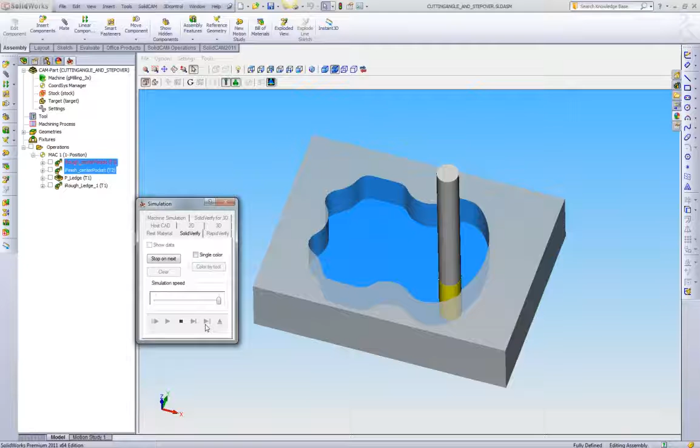To show what the stock looks like before this cut, we'll go to our SolidVerify and play this. Here we have just an iMachining roughing toolpath, and then we also have a finishing toolpath to make sure it's the exact geometry. If we show our target, what we can see is we have this center pocket finished, now ready to machine this ledge.

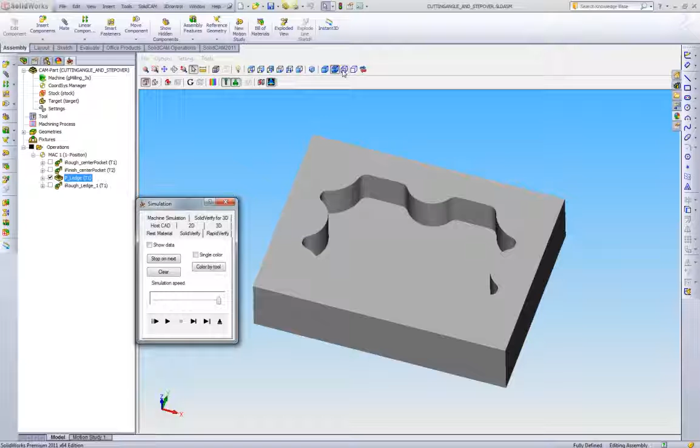We have a standard pocketing toolpath set up here. As we can see, we have our 4 offset passes to machine that ledge. Let's go into the SolidVerify, and we're going to take a look at what happens. We're going to go to a top view, and we're going to also switch on wireframe so we can see how the tool is cutting.

Here we have the tool entering into the first corner. So there's a few things we want to show here and measure. We're going to use a screen capture utility called Jing that I like to use. It's going to allow us to draw some arrows on this.

Now what we have here is we have a few things going on. We have the toolpath, and we have what the tool is doing along this toolpath. We're going to draw an arrow for the cut direction. Here we have the tool moving in this direction. We can change this color to blue if we like, and we're going to label this as cutting direction.

Now, when we look at step over, or really what we're looking at is width of cut, we want to measure width of cut based on the cutting direction. So we're going to draw 2 arrows on where the tool is touching at the first point, here, and where it's touching here. We always want to be measuring with the cutting direction.

Now what we see here is this width of cut that this tool is actually taking in the corner is actually 3 to 4 times larger than the width of cut on straight lines. Generally, when we think of step over or width of cut, we are thinking in terms of straight lines. But what happens when you look at the tool changing direction, turning corners, going into concave areas, the direction of the tool is changing, and it's not just cutting a straight line. So what we have here is this step over that's increased 4 times over the straight line cut.

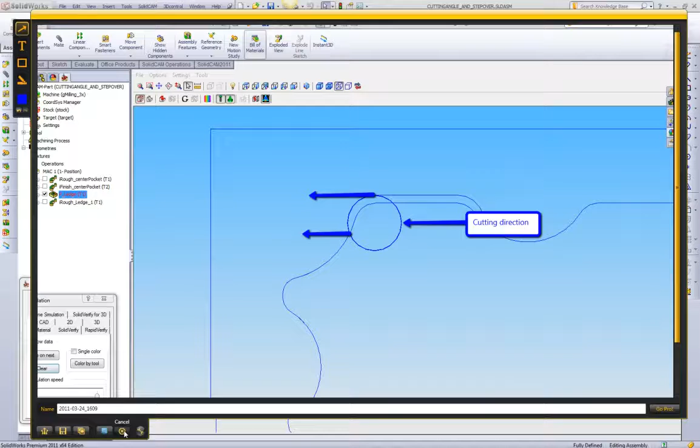So let's keep on going a little further. Now we have our next motion. Here we did a circle coming around into this little corner. We're going to do the same thing with Jing, and we want to measure what the cutting direction is and what our width of cut is.

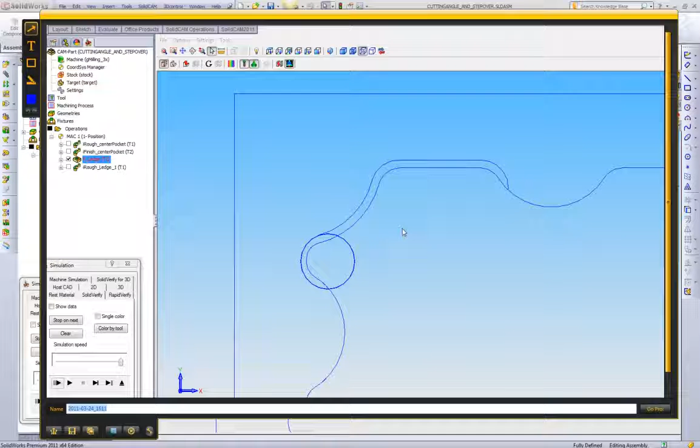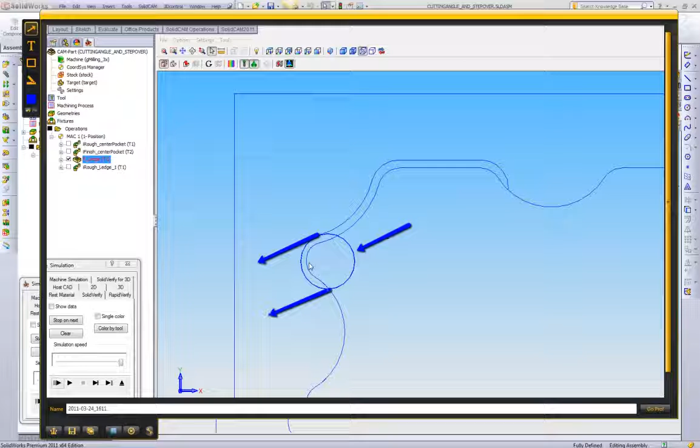Now since we're doing a corner, the end result is the cutting direction is generally looking something about like this at the end of the corner. So now if we measure our width of cut, once again going parallel with our cut direction, here we can see the width of cut versus our straight line is something maybe 6-7 times the width of this. So here is where we have all of this tool overloading with standard parallel style toolpaths with our standard step over.

We'll just play through the rest of the toolpath to show you what you get. Now visually what we see is we have a constant width of cut just looking at this visually with our eye. But in reality, as we just saw, the cutting direction is not a straight line, so the width of cut that the tool or the material that the tool is actually removing is not constant by any means.

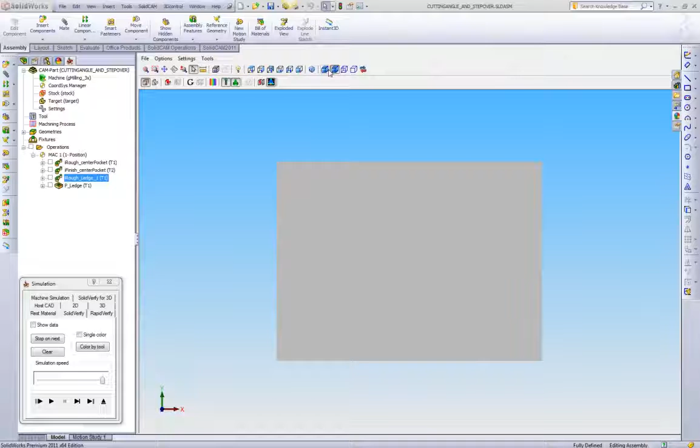So now let's go take a look and see what iMachining gives us here. We're going to take that pocketing toolpath and just drag it below it. We're going to go back to our SolidVerify and repeat the exact same steps. We'll zoom in on this corner, we set it to our top view, and we also go to wireframe. And we're going to single step through iMachining.

Now the first thing we see here is that iMachining is gently entering into the material. Once we hit here, we can see we're now at our width of cut, or the controlled step over we have.

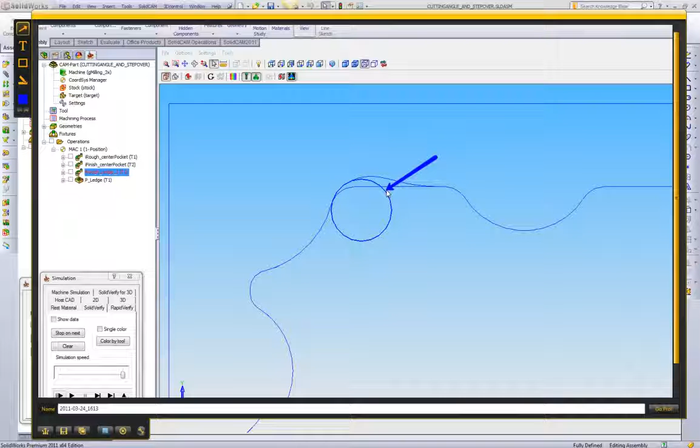We can see as we're coming into this corner now, iMachining is starting to roll the tool in this direction, and we can see our width of cut changing. Now, let's use Jing again and let's see what happens here. We're going to draw our arrows again. So what we see is, since we're kind of turning this corner, we basically have the tool coming at a direction roughly like this. Once again, we'll label this cutting direction.

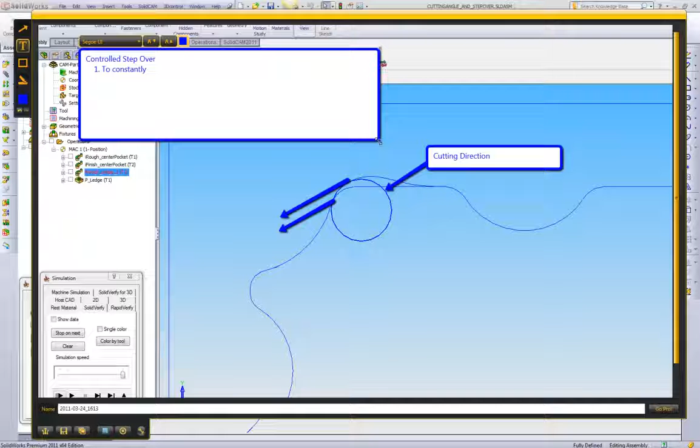We're going to draw our arrows. Now what we can see here is this width of cut, based on cutting direction, is now the same as the straight line width of cut. Which brings us to our definition of controlled step over. And we'll type this out, that way it's very clear for everybody. So controlled step over is to constantly adjust step over to give a constant width of cut based on cutting direction.

So this is important, very important to think of. We all know what step over is, but generally we are only thinking of step over in straight lines. iMachining is using controlled step over. This is where we're actually adjusting the step over to give a constant width of cut.

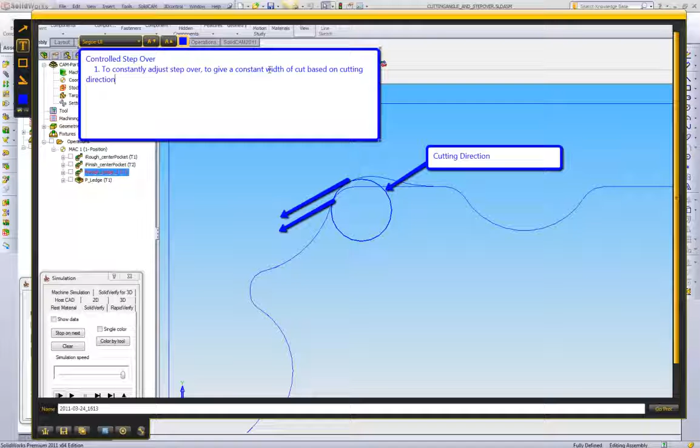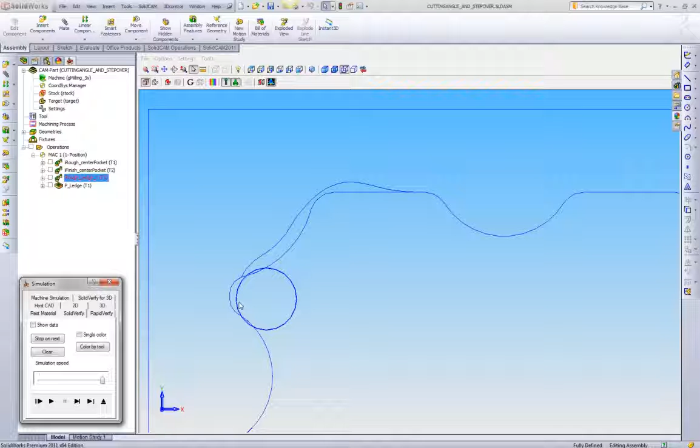We're going to continue playing through this a little bit. Here we see an interesting thing that happens. iMachining, as it was trying to cut this corner, there was no way for it to hold the width of cut or the step over that we defined, so the tool actually had to back away and could not get into this corner, for it was impossible to give the user the controlled step over it wanted entering into this corner. And then we'll play through one loop. So there we have one loop.

Now here we see the very big difference to the standard parallel offset toolpath. Looking at this, it appears as if we'd have a varying width of cut or a varying step over, because we see different amounts of material being removed. But in reality, we measure the width of cut based on tool direction to give a constant load on the end mill, because we're mostly concerned about what the end mill is doing when it's removing material, not what the toolpath looks like in a CAM software. Here we see we get this varying step over along this entire part. You can see it getting to the thickest points when it's at the straight lines.

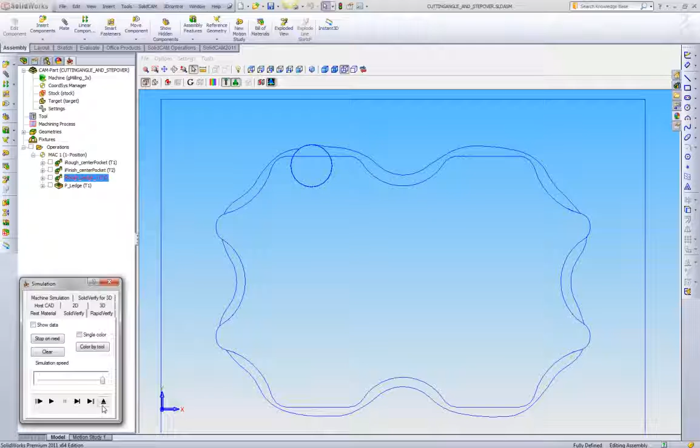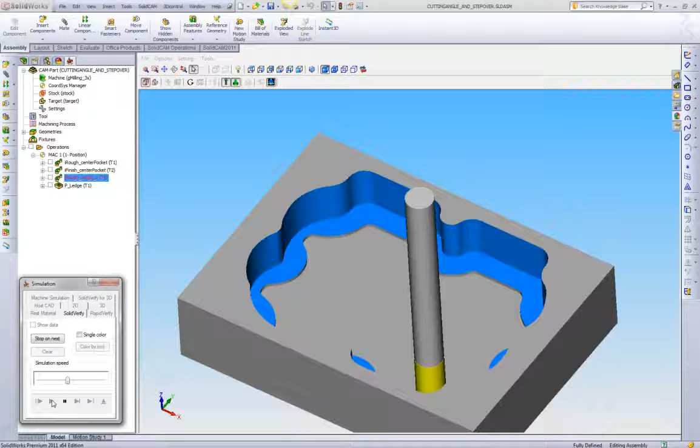And we'll actually switch to an isometric and just finish playing out this toolpath so we can see iMachining finish. What iMachining does is it continues to progressively shave away the material in a constant spiral motion with our morphing spirals. Then at the end it goes through and cleans out all the corners to remove that material. We'll also take a quick look at the toolpath again. So here we have our standard pocketing step over, and here we have our iMachining toolpath, where we can see it's actually varying.

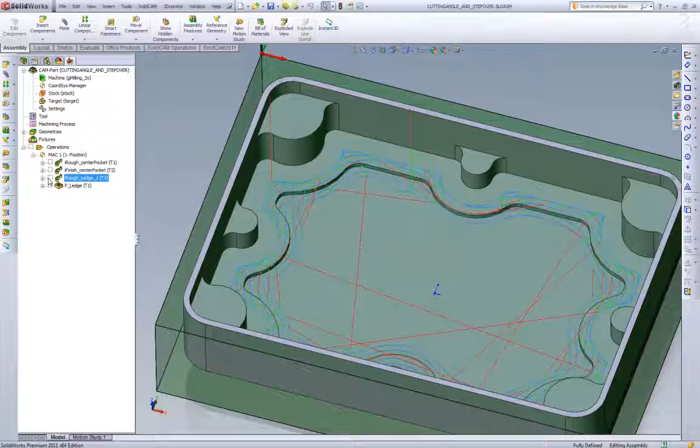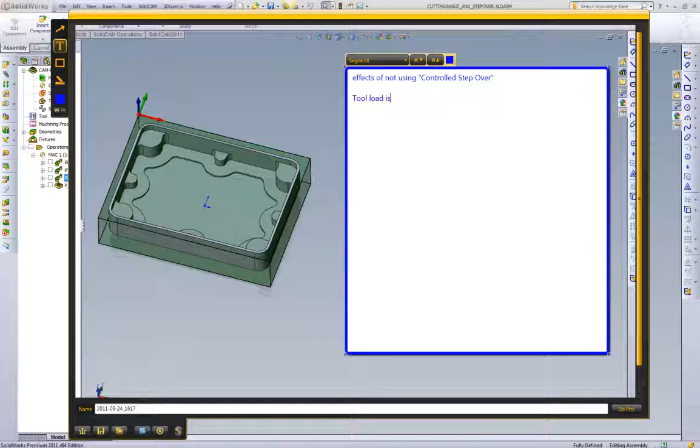Now what we want to do is review what this actually does for us. And once again we're going to use Jing. So what are the effects of not using controlled step over in your CAM software? The easiest thing to look at is the tool load is increased in the corners, i.e. non-straight line cuts. What this is going to lead to is tool wear and fatigue. It's going to lead to broken tools. It's going to lead to multiple depth of cuts.

And when we pick multiple depth of cuts, it's going to wear the lower portion of the tool's flute. So for instance, if we had a tool with a 1-inch flute length, generally we might only be cutting with a depth of cut of 100 thou. So we had 1-inch flute length, but we only cut with 100 thousandths. That means we never get to use the other 900 thousandths worth of flute length. This is what leads to premature tool wear before the tool's actually finished machining.

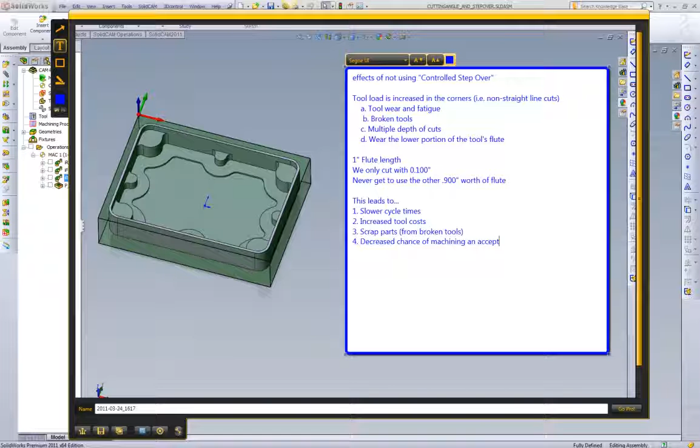And I think a lot of us are familiar with retipping end mills, where we grind off the bottom of the end mill and then retip it, because the upper portion of the flute is generally still good. Now the end result is this leads to, one, slower cycle times, higher quoting costs from that. We have increased tool costs. We have scrap parts from broken tools. And we also have a decreased chance of machining an acceptable first run.